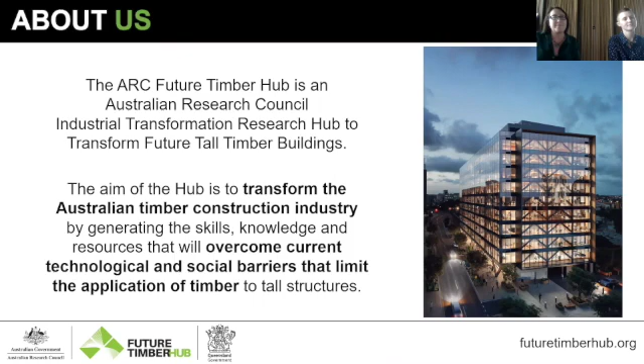Our partners are experts from industry, government and academia. We've got the Queensland Government Department of Agriculture and Fisheries, the University of Queensland, the Queensland Fire and Emergency Services, Hyne Timber, Arup, Lendlease, Scion, the University of Canterbury, Griffith University and the University of British Columbia. As well, within our projects under the hub, we have individual partners depending on the project scope. We've formed a unique partnership that spans the entire timber supply chain, from primary producer to construction regulator. Our interdisciplinary team includes product manufacturers and wood scientists, architects and structural engineers, fire safety engineers and construction managers.

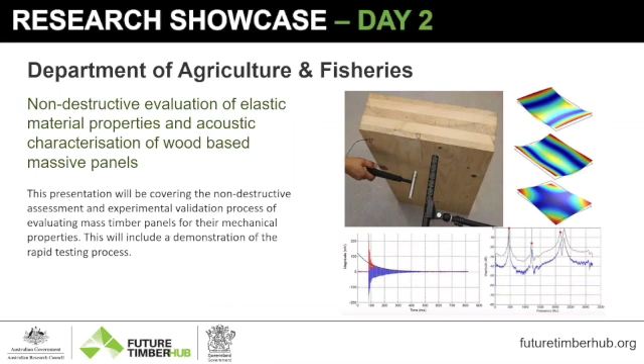The next presentation is a non-destructive evaluation of elastic material properties and acoustic characterization of wood-based massive panels. The presentation will cover the non-destructive assessment and experimental validation process of evaluating mass timber panels for mechanical properties, including a demonstration of the rapid testing process. The speaker is Adam Faircloth, a timber engineer at DAF and an MPhil student on a project through Griffith University. He has a bachelor's in mechatronic engineering with current research focused on vibration and acoustics and non-destructive technology. Over to you, Adam.

Thanks for the intro, and thanks, Shannon, for the really interesting presentation so far. This project is, as Shannon said, the second of three projects which DAF leads in the Future Timber Hub, all centred around developing a non-destructive evaluation system for evaluating CLT mechanical properties.

This talk will be broken down into about 5 steps. I'm going to go through a bit of background and introduction, then lead into the aim of why we went with the direction we did for this project and why it's necessary, the developed vibration methodology that we found through literature and what we've adopted, how we validated our results, and what results we've gotten so far, as well as outcomes and benefits that this project would have to the timber industry.

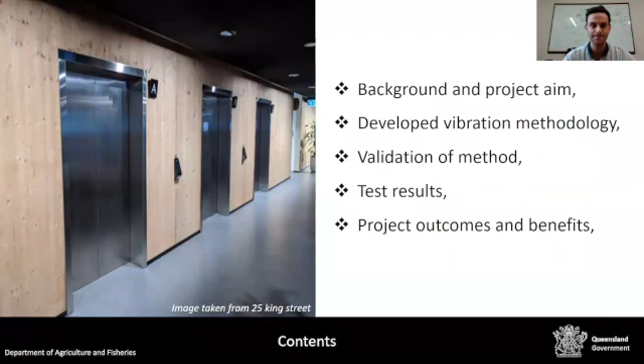Before I go too far, I'd like to acknowledge collaborators directly with this project: XLAM, Hyne Timber, Lendlease and Arup, as well as Griffith University, the institution where I'm doing my masters. On the right hand side is a list of my supervisory team. My principal supervisors are Dr. Hassan Karampour and Dr. Stephen So at the university, and my external supervisors are Dr. Chandan Kumar, Dr. Loïc Brancheriau and Dr. Henri Bailleres. Loic is based in France at the Centre for International Research and Agricultural Development. Henri is based at Hyne Timber as a product development manager, and Chandan works with me here at Salisbury.

A bit of introduction about wood-based mass panels: they're widely used and becoming a more commonly accepted building material for mid to low rise structures, providing a lightweight and cost-effective alternative to common construction techniques such as steel and concrete. For example, this image shows construction at the Monterey building, an apartment building at Kangaroo Point, which came about as a position above the Clem 7 tunnel in Brisbane. They couldn't make it too heavy due to it being above the tunnel, so using timber as a lightweight alternative was a great use for the product.

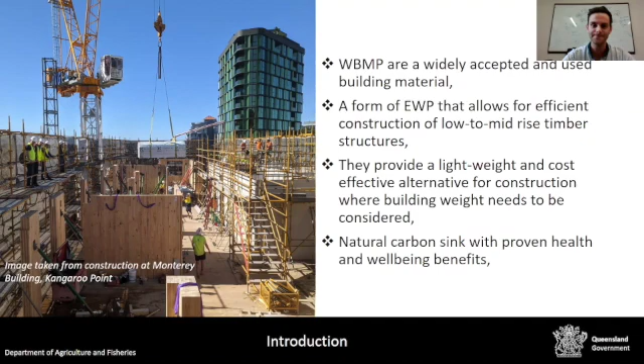With wood-based mass panels, there's a wide range of different variations, such as glulam, which are glue laminated timber panels and timber beams, cross-laminated timber (CLT), nail laminated timber, which are fixed with nail fasteners rather than adhesive, and veneer-based mass panels. For this study, we decided to focus on the most mainstream product.

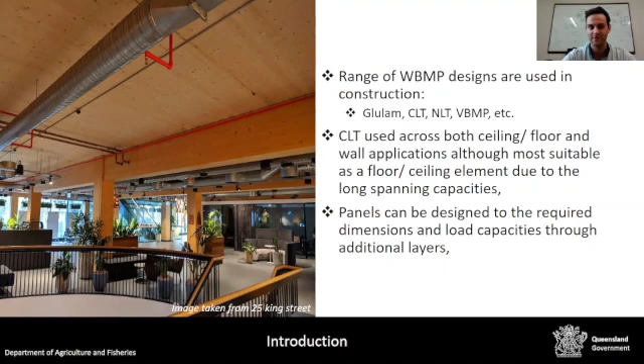Which is CLT. CLT is commonly used as both a flooring and a wall product, but is most applicable to a flooring or ceiling element due to their large spanning applications. Panels can be designed to whatever requirement—basically the only restriction is the size of the truck that's taking them on site.

Cross-laminated timber is cross-directional layering of different boards, where each layer reinforces the previous one along the major axis, which is along the face grain of the face boards, producing a stiffer result than the minor axis, which is perpendicular to the face boards.

The design of CLT or glulam composite systems is more governed by their serviceability rather than their ultimate strength, which means by determining mechanical properties such as elastic modulus and shear modulus, we can determine the application for these products rather than going off how strong they are.

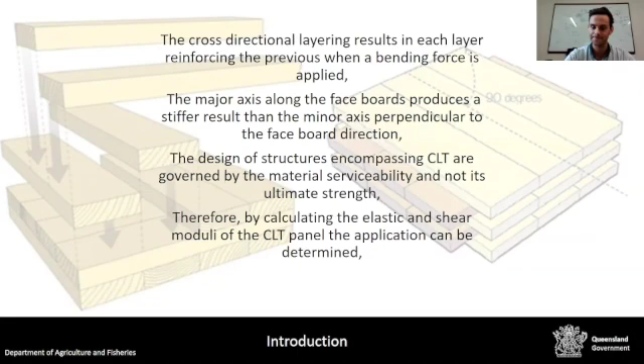For determining these mechanical properties, there are two common methods that industry uses, one being an averaging or pre-manufacturing technique. This makes use of non-destructive evaluation technology for boards, which is well established in the industry. The boards are non-destructively evaluated, and then as they're put into a panel, each value is averaged together to give a single result for how the panel would perform.

The second method, a post-manufacturing technique, is a static testing method, which, as you can see in the top left figure, consists of a 4-point bending configuration where load is applied at a constant rate and deflection is measured about the midpoint over the duration of the test.

From this test method, we get a load versus displacement curve, as you can see in the bottom left, from which we can determine stiffness. The static testing method is accurate and effective, although it can be costly and time consuming to conduct, as well as destructive at times.

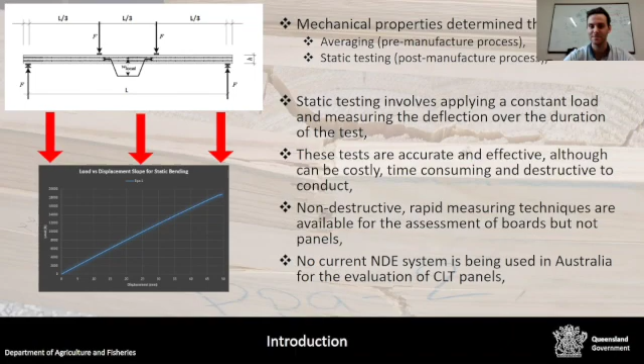As I said before, non-destructive techniques are available for beams and boards, although no such system has been developed for cross-laminated timber panels to be used in situ within a manufacturing facility. To the research team's knowledge, we couldn't find any system currently being used for CLT in Australia.

Which brings us to the aim of this project: to research, develop, and validate a non-destructive evaluation system for CLT panels for use within an inline application for a manufacturing facility. This could be summarised into about 4 points of what we aimed to do.

One was to develop a vibrational-based evaluation program, software and methodology to calculate the mechanical properties of CLT. The second, to investigate the in-situ testing requirements, such as how the panel is going to be supported during the tests, and how we can ensure a rapid technique is being used.

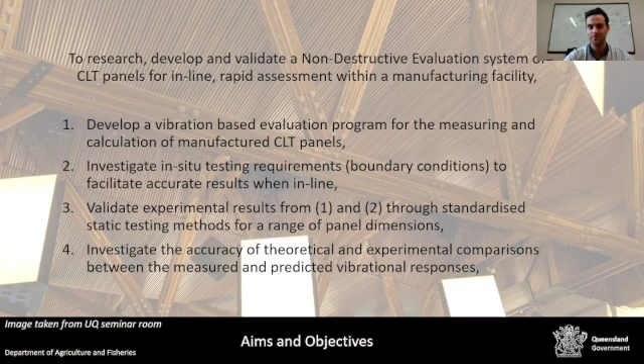The third was to validate these experimental results from the first two points through standard testing methods. And the fourth, to investigate the accuracy of the theoretical and experimental comparison through the experimental tests conducted in the first two points and the theoretical modelling we've conducted.

The methodology we've adopted was previously investigated back in 2008 by René Steiger, which is based on a two-pronged approach, where the upper half of the slide shows the experimental modal analysis.

The panel is supported by whatever boundary condition is selected and tested along an array of points to obtain both impact data and acceleration, using a surface-mounted vibration sensor accelerometer.

From that, taking the Fourier transform of those results, we obtain resonant frequencies for those responses at each point along the panel. At the same time, theoretical modal analysis or simulations are conducted of the panel using the known geometrical properties—size, dimensions, weight—as well as some elastic estimations for stiffness and shear.

Then, combining the results of those two approaches, we can refine the elastic estimations that the model makes until the error between the two methods becomes very small or nothing.

But before we could get into too much testing, we needed to know what boundary condition would be, one, best for industry, and two, give us the most repeatable and efficient or accurate results.

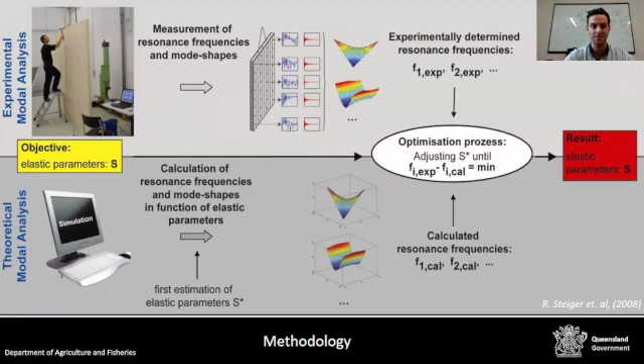The first one being a simply supported and freely supported boundary condition, where each parallel edge is either freely or simply supported by sitting on the horses you can see at the bottom of the picture, or sitting on air, not supported at all.

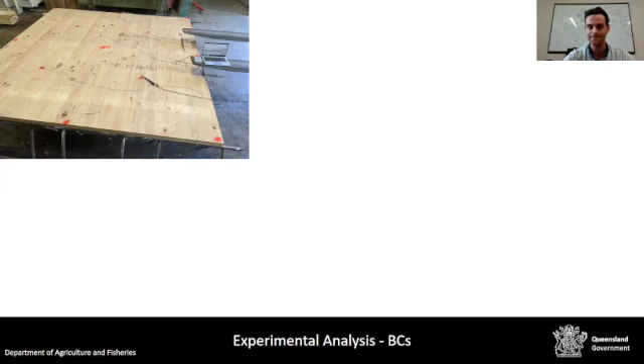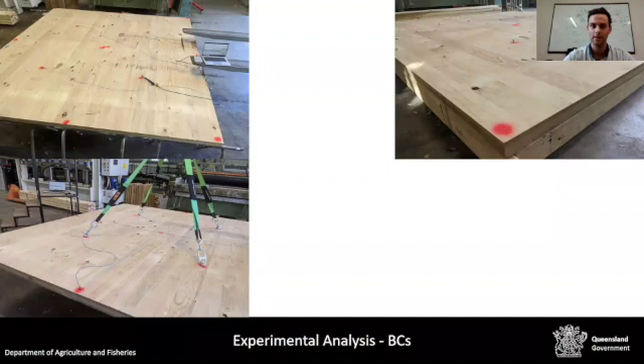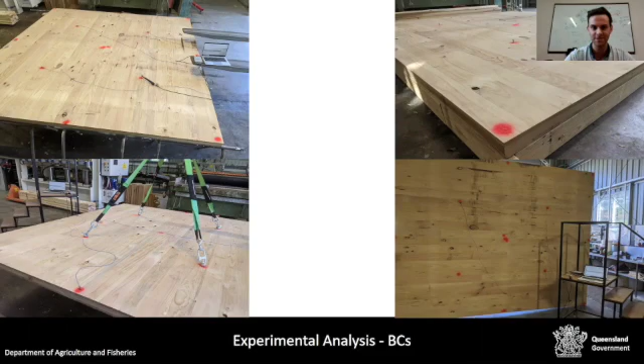The third condition was a freely supported system hanging using elastic recovery straps. The fourth was a simply supported on all sides configuration, with the panel sitting on a wooden frame we constructed. The fifth was again another freely supported condition, but this time on edge, using those same recovery straps. And the sixth method was again another freely supported condition, but this time using an air bladder or airbag setup.

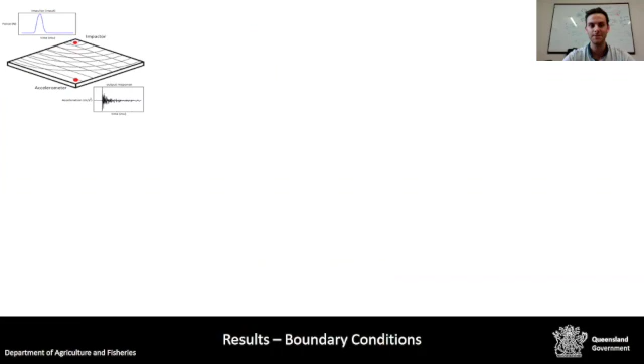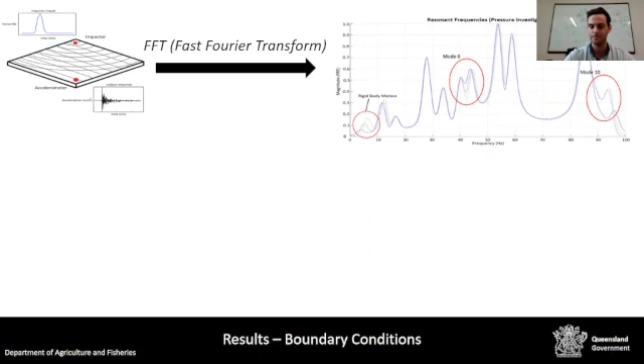These tests are conducted quite quickly and easily using minimal equipment. All we needed was an accelerometer to measure the vibrations and an impactor, or for these tests, an electronic impact hammer. As you can see in the top left figure, an impact is applied to the panel at one corner and the impulse measured at the next. Taking the FFT of that result, we get a frequency spectrum that looks something like that.

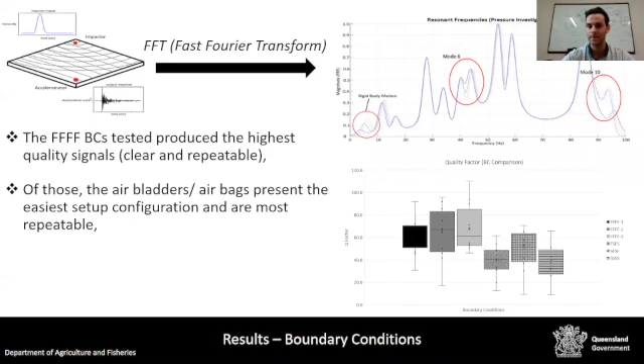We also found with those air bladders that the pressure used to inflate them did have some effect on the system's ability to obtain certain frequencies. As you can see in the top right hand plot, this is an overlay of varying pressures, and you can see that there is some shift in frequencies for some modes, some dampening of other modes, and some joining of modes as well.

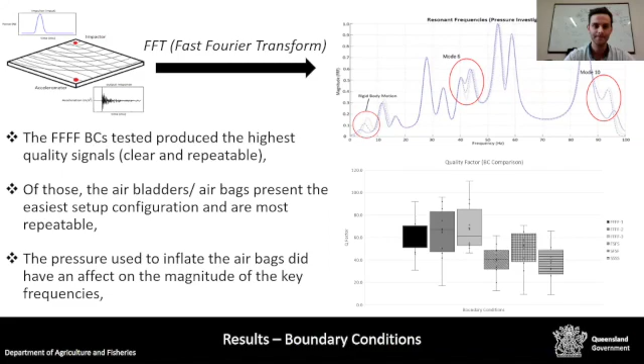The next investigation we conducted after being happy with our boundary condition being the airbags was to look at geometrical sensitivity. If we were to scale up from the common panels used for those boundary condition tests to a longer length, how would our system cope with that kind of change? Using the UQ facility at Pinjarra Hills, we got access to larger panels and larger sample sizes. Using a panel 6 meters long by 2.4 meters, we conducted 4 impact tests using the accelerometer moving to the different positions shown in the figure. Those panels were then cut in half and tested on the two sub-panels to give a comparative result.

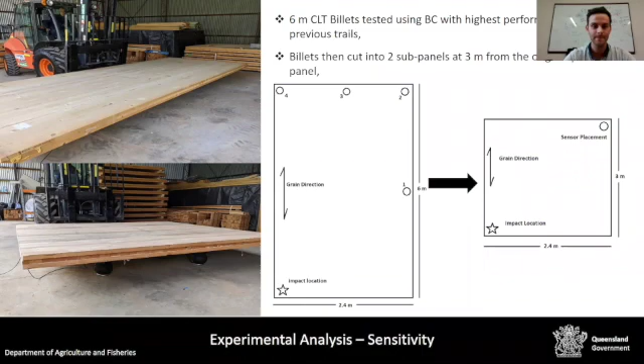Results show those graphs look a little bit sporadic, but positions 1 and 3 show that there were some frequencies missing and amplitudes dampened, whereas positions 2 and 4 had a lot more frequencies available. This means that positions 1 and 3, being at the center of each of the minor and major directions, dampened some bending modes. So by having the accelerometer at position 2 and 4, we were able to obtain all frequencies required for evaluating the panel's mechanical properties.

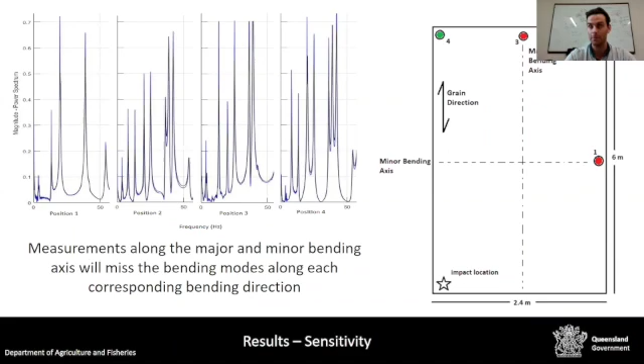Moving into the theoretical component of the method, we looked at the influence of shear as a known obstacle for theoretical analysis of panels or large beams. For panels with a length to thickness ratio greater than 20, thin plate theory or thin beam theory applies, meaning the shearing in the panel doesn't need to be considered and isn't influential to the stiffness determination. Although for panels with a ratio less than or equal to 10, the length to thickness, shear becomes more influential on the result and needs to be considered.

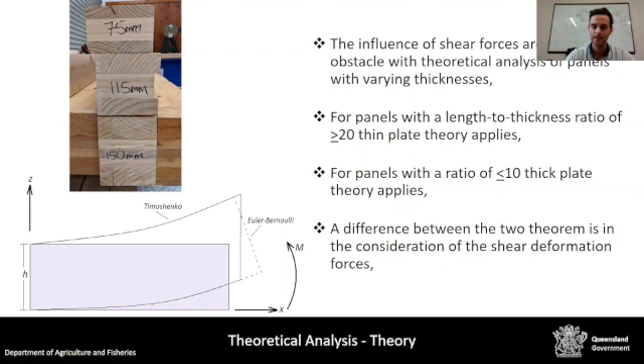Moving on to the modal reconstruction component we wanted to look into, we wanted to make sure that the frequencies we were obtaining, and for what mode we were saying they were for, matched with our simulation result.

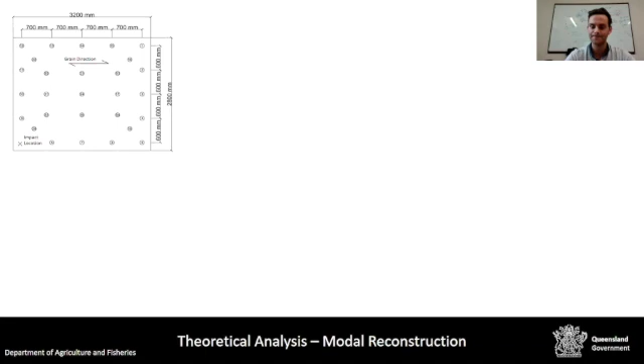To investigate this, we used a method similar to what René Steiger used for assessments of the whole panel across different arrays of points for the boundary conditions we selected, which gave us an acceleration value using the accelerometer. By integrating that twice to get displacement, we were able to generate mode shapes.

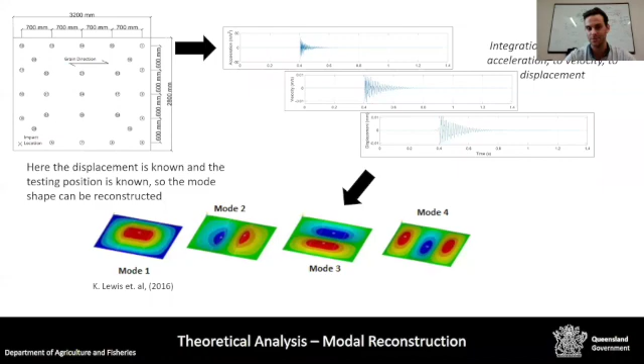So here, if we know the displacement and we know the position at which it's being tested, we can reconstruct those modes.

Results from this study are still being investigated, but preliminary analysis found that we were able to accurately match the mode shapes from the first 4 to 5 modes for a freely supported boundary condition. Comparing experimental frequency results with the simulated frequency results, we were able to get up to about the 12th mode within 10% agreement.

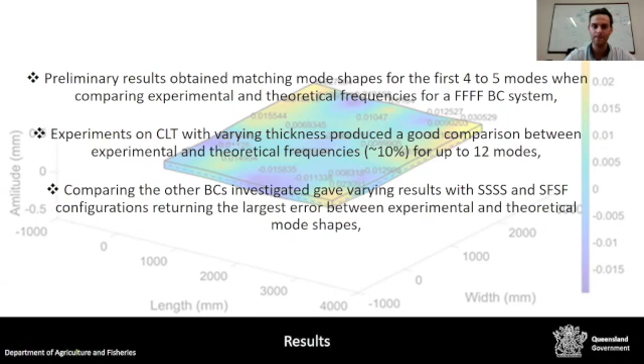This shows that while we're obtaining correct frequencies, the mode shapes or displacements we're observing with the sensor may not be correct, but we're still investigating some of these causes. Comparing other boundary conditions we investigated gave varying results with larger errors than the freely supported systems.

For the validation component of the study, once we'd conducted the experimental results and theoretical analysis, we needed to validate to make sure the results from our model non-destructively matched up with the predicted values that would be obtained from static testing.

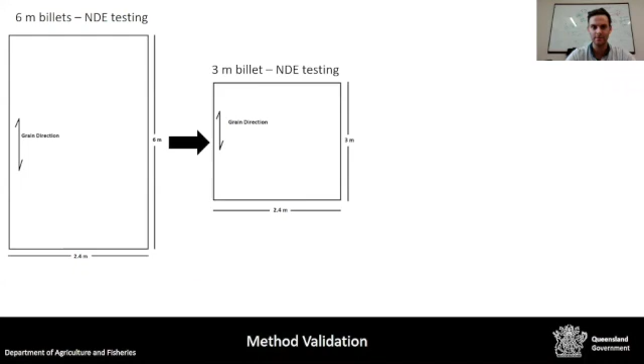Taking those 6-metre billets obtained from the Pinjarra Hills site, we cut them in half into two 3-metre subpanels, then cut 2 strip specimens from the edges of the panel. These sections were cut to 0.3 metres, or 300 millimetres, in width to meet the requirements of the international standard for CLT testing, 16351. These specimens were then tested in a 4-point configuration as introduced earlier.

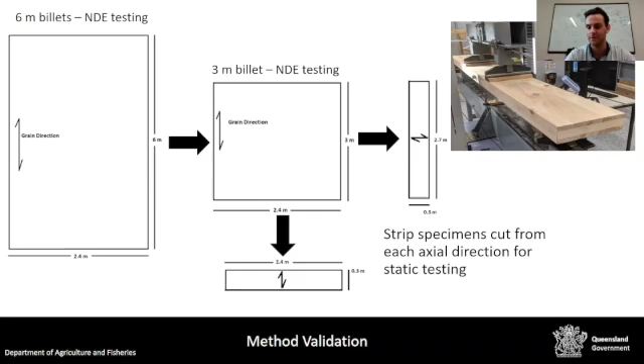Summary of results: all the NDE testing had been conducted and large-scale trials completed. We assessed a range of different panels and thicknesses, ranging from 75 mil to 150 mil, with varying laminate layers from 3 layers to 5 layers.

In total, about 80 static tests were conducted, and so far we've got pretty good agreement, between 10 to 15% error, between our non-destructive results in comparison with our static testing results.

Results for the thicker panels are still being analysed, as well as any differences between the thick and thin plate theory.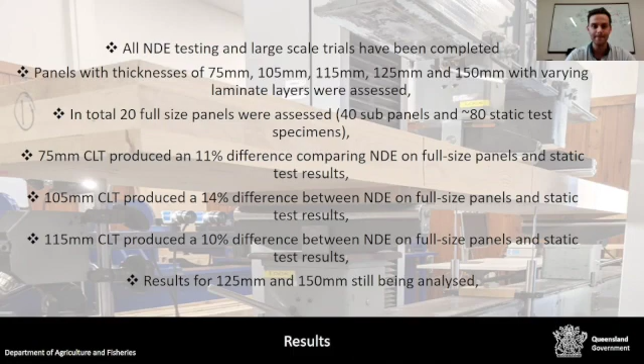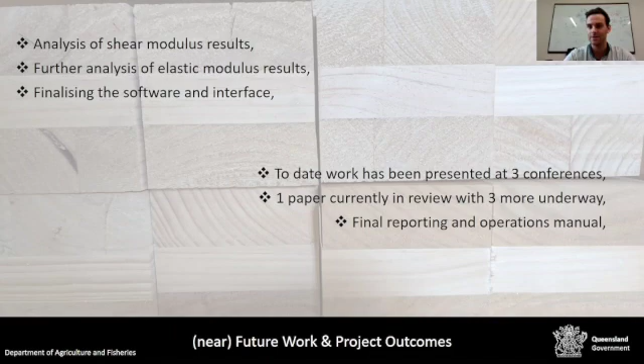A bit of a summary of what we've done so far in terms of outputs from the project. To date, we've presented at 3 conferences, with 1 paper currently in review and 3 more underway and planned. Final reporting and an operations manual for our software is close to being completed.